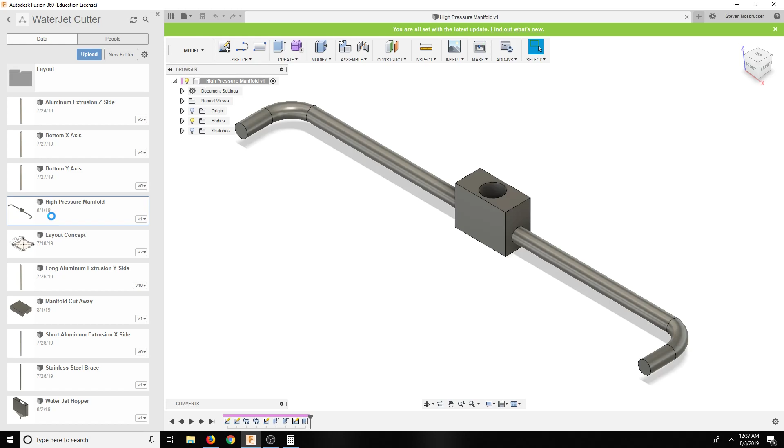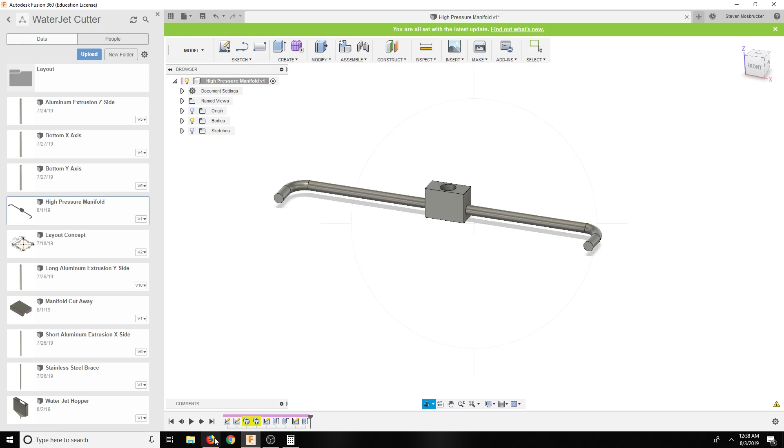So what we can do, there we go, now that is the right shape, about. And then remember they have about 1/8 of an inch hole, so that's a good question. Now if I bring this over here and look at the question with that gland nut.

.60, 1/4 inch, okay so it's 1/4 inch. So that definitely fits in there. I'm sure that's definitely not 1/4 inch, about 1/8 of an inch hole. But the question is how big is the hole in there? Is that 1/8 of an inch hole? Because obviously it tapers down to about 1/8 of an inch hole. So it might be a 1/4 inch diameter, but 1/8 of an inch hole at the end. If that's the case, then it would fit perfectly in there, which is ideal. So I think we are in good shape here.

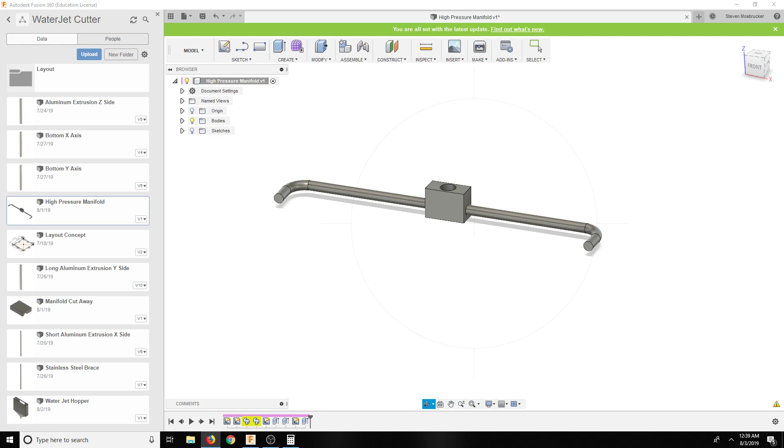Everything's kind of coming together. So basically what I'm talking about is that this guy here needs to fit inside of that hole. I'll see if I could contact these guys and get a model for this so we could move forward. But it does look like they added the 60 degree so that we could bottom out on it. And it's probably millimeters, but it looks around 1/8 of an inch hole. But the taper might be more extreme than 60, might be a 45. We'll have to see.

I'm not too sure, so it could possibly leak, so we'll see.

Well, the other thing is that this is a 9/16. This is the right hand, 1/4 inch tube, 1/4 inch tube, 1/4 inch by 28. This is left-hand thread, goes on there, and I talked to him this morning, told him to look out on his email for some drawings this next week.

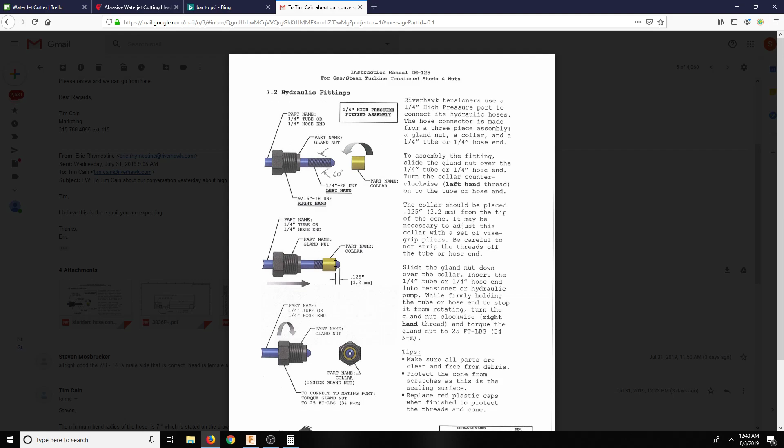And I'll make some drawings of the manifold. Now the manifold is pretty accurate to lengths here, so I can get a quote on this, and it is indeed 60 degrees, so this should be fine. And then this is the 9/16, 9/16, 9/16 thread, 9/16 thread, but this has to be

M14. Where'd it go? I think it's down further here. Oh, here it is, M14.

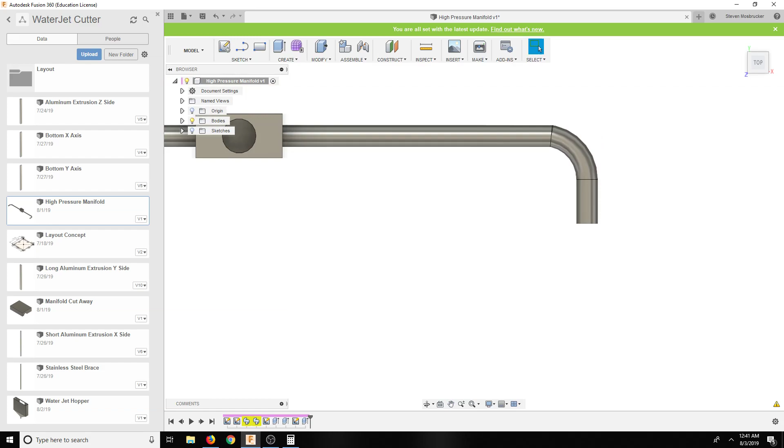M14 by 1.5. I thought it was M15, so I think M15 is not a popular fitting. So M14 by 1.5 is supposed to be the fitting size for this. So this is going to have

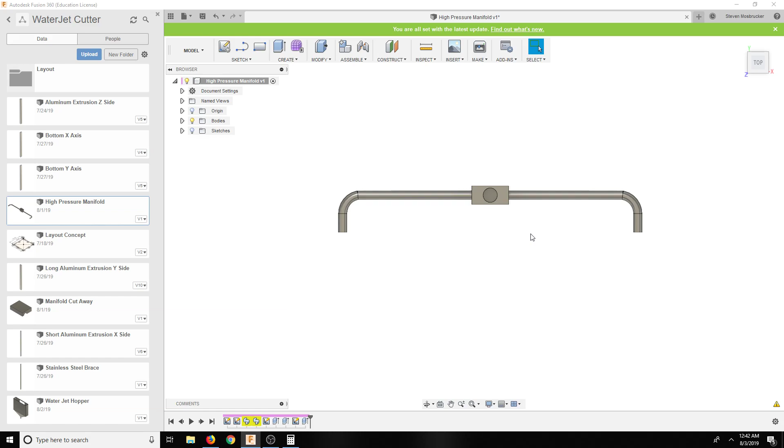and then it's got to go in there and touch. So what I have to do is get them the depth to the face, and then see if I could stick a caliper in there and get kind of an idea on how deep that hole is in there. Maybe stick an 1/8 inch something, or put a 60 degree on something and shove it in there

and see how far down it will go. But this is kind of the manifold here, and then maybe because I have the pump, I might be able to model it. I was gonna say maybe scan it, but it's too big in diameter.

One of my friends has a scanner, and it's pretty good, so maybe be able to scan it. I think it's too big in diameter to scan and too heavy for the carousel on it anyways.

So yeah, I like that, so save that. So that looks good. Now that we got all that stuff figured out.

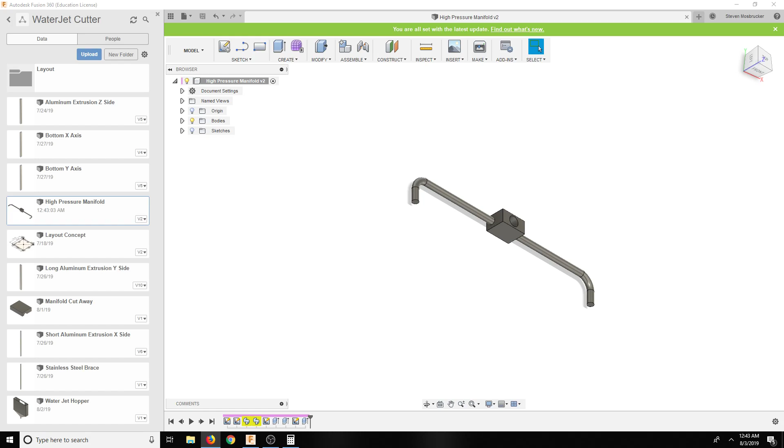So again, the issue with the cutting head is that basically we just have this face in here, and the face is very, very small to seal on. And then we have the ruby on the inside, but I don't think you're supposed to seal on that, but that's kind of what it looks like it's trying to do.

So maybe we could have some sort of negative angle and then go down and seal on that ruby. I'm pretty sure that's what they want you to do. It's not seal on this face, but seal on the ruby. Because then it could pop the ruby up, and then the ruby might not seal. I don't know how well that ruby's going to seal, because it's just stainless. It's just a piece of stainless, and there's no O-ring or anything on here.

It's just straight corners, and it's got a tiny little hole in the bottom, even smaller hole at the top, and it's tapered at the top. There's got to be a reason why it's tapered at the top. It's got to be because something goes in there and seals on it. So maybe I have to talk to AccuStream on Monday to see if I could talk to them about how they seal on this thing.

And maybe also check if they have something off the shelf, some sort of solution that will mount to this thing and have a 9/16 come out the other end. That doesn't have... I mean, it's basically that case. It's an adapter, right?

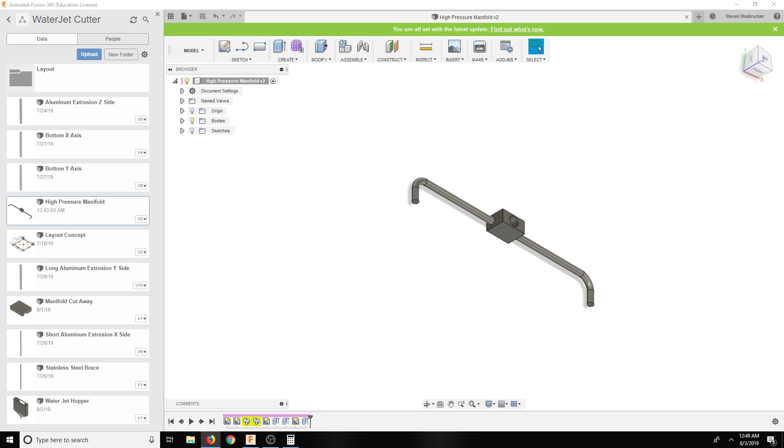Ooh. Aw, female to barb hose. Wait, what was that? There it is right there. Easy peasy.

And M14 by 1.5 barb fitting, 1/2 inch hose ID. 1/2 inch, it's got a tiny little hole in there. It doesn't really need to be 1/2 inch, but I do like... oh, this is for a different project.

That's a little too far extension for me, but it's got an O-ring on it. Guess the O-ring would work. O-ring's fine, it's not bad. $12, oh man.